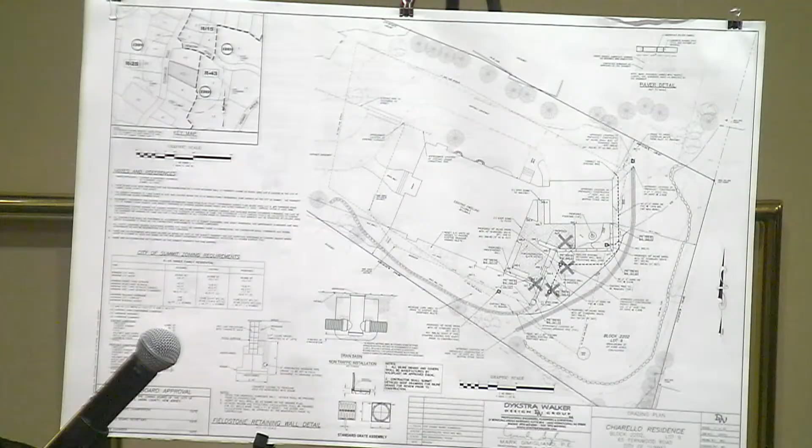All right, and I think you testified to this as well, but just to repeat, where will the drain system discharge? Everything on site discharges underground through the piping networks into the Fernwood Road drainage system. All right, is that the same discharge location which currently exists? Yes. And the grading and drainage system being proposed as part of this project are designed to make sure that the water is directed away from the neighbors' properties, not onto the neighbors' properties? Yes, that's correct. And could you please describe the soil erosion sediment plan?

There's roughly 4,100 square feet of proposed disturbance associated with this property. We have inlet protection on all of the inlets on site, both existing and proposed, to capture any silting that may occur during the construction process, so that way it doesn't end up in any of the drainage system on site or downstream. And there's also silt fence proposed along the downslope side of the property to also capture any overland silt conveyance.

Okay. Now, I do have to just make sure I check all my points here. There is a variance that is needed for this application, correct? Yes, there is. And that has to do with lot coverage? Yes, it does. And that is an existing condition? Yes, it is. And that was a condition not created by this applicant. That is correct, it was not. All right. And you testified that you were able to reduce that existing condition by 2 feet? 2 square feet, that's correct.

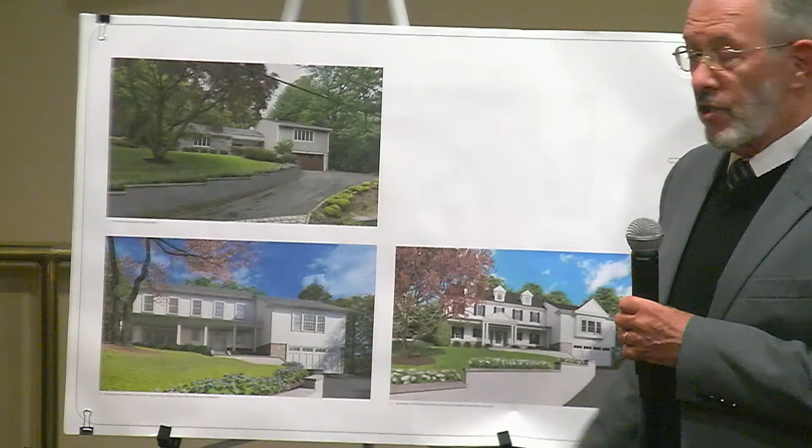What can be seen is the existing is in the upper left-hand corner. The original facade that was proposed is shown in the lower left corner, and the new facade is shown in the lower right corner. I have Mike Johnson here, and I have the architect Steve Kowalski if there's any questions. And we are up to A4. So this would be marked as A4.

Mr. Weber, I think we'd love to hear 5 quick minutes from your architect. If you could swing it. If I could ask Mr. Kowalski to be sworn in to give testimony in this matter.

Before I forget, I want to appreciate the board's hearing us tonight. I believe that this is the first time in the decades that I've appeared before this board that the board has had 3 hearings in 1 week. And it's remarkable, the dedication that you show to the city and to the citizens. Thank you, Mr. Weber. Your comments are greatly appreciated.

All right, if you could raise your right hand. Do you swear the testimony you're about to give in this matter is the truth, the whole truth, nothing but the truth? I do. And please state your name, spell your last name. Stephen Kowalski, Kowalski. Thank you. And you were just accepted by this board in the April hearing. No changes to your credentials since that last hearing? That's right. I imagine we'll accept you back once again. Welcome back. Thank you. So if you could just give us a brief overview of the changes between the last design and the current design, I think that would be helpful to the board.

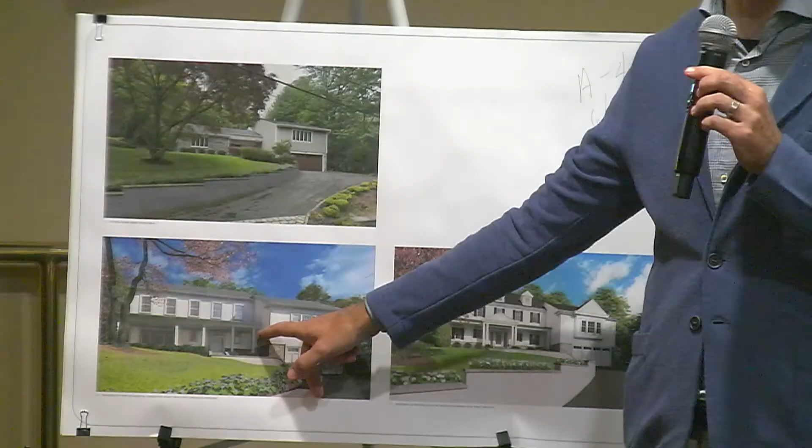Can you just walk it down, because I can't see? Oh, sure. You have this rendering. The only difference to what you have in your drawings is we're showing the prior approval. That's right, it's in the existing one, I'm sorry. Okay. But I can pass it around if you'd like.

And just to confirm, no changes to setbacks or height or overall FAR? No. That's correct. Okay, good. And that attic is unfinished, no plans to finish? It's unfinished. And there's no headroom. There's no space up there to use. Excellent. Okay, so any questions from our board experts for this witness? I do not have any questions. Neither do I, Mr. Chairman. All right, great. Thank you so much.

Questions from the board? One question. Okay, please. On this plan that you have in front of us, it's very clear the unfinished attic where the gables are. What's the ceiling height in the back space behind the primary bathroom? It tapers down to 0, but I believe where the bathroom is, it's already below 7 feet. Perfect. So it no longer counts as FAR once you get beyond that wall. Thank you for clarifying. Great.

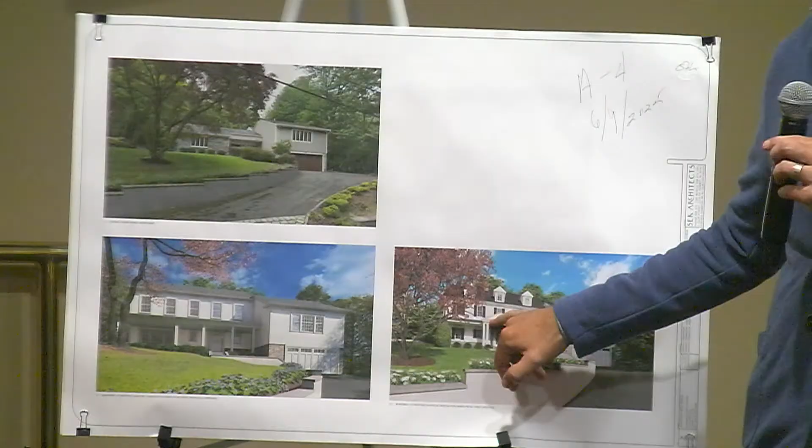Mr. Nelson, please. Just to be clear, the front gable doesn't come out any more than the front porch already is, or it does? We pushed the porch back and left the gable where the front porch was. So the gable is at the line that the porch was in the prior application. Okay. The remainder is pushed back to get that little definition.

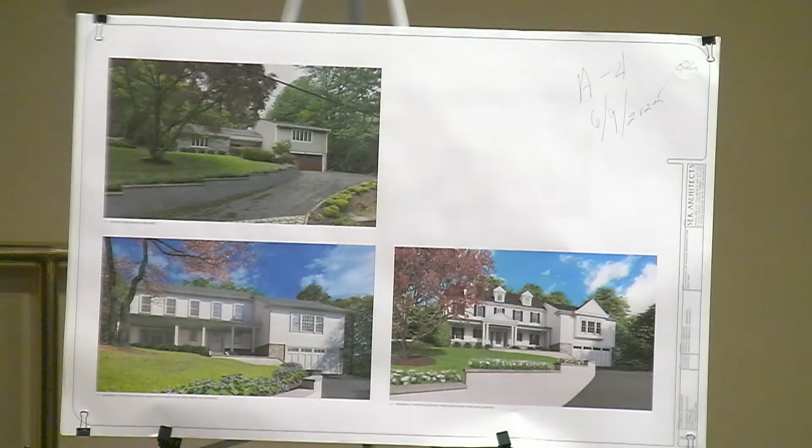And this might just be your artistic rendering here. There's no excavation for the driveway to make it deeper? No, that's a wall, that's the angle of the perspective. Shows more wall. No changes to the driveway, which is quite steep. Any other questions from the board for this witness? Seeing none. How about the public? Any questions only for this witness? Seeing none. Okay, great. Thank you.

That's probably the only witness we need tonight, Mr. Weber, so if you'd like to give us a summation that probably runs longer than the whole of your testimony, be our guest. We'd like to substitute A4 for the perspective that was originally presented to the board. Thank you so much. Okay, great.

Andy, conditions? First. What's that? Public. Oh, yes, sorry. Anyone wishing to comment on this from the public? Seeing none. So no new conditions, we'll just stick with what was in the prior approval. That's correct. Great. And our prior approval, give me one second. But there was an FAR variance, Jim, if you could confirm? FAR, building coverage, lot coverage, steep slope. Okay. So five votes are required to approve.

Okay, great. With that, we'll enter into executive session. Who'd like to begin? I can start. I can easily support this application. First, there are really no changes over what we approved in terms of the variances. And as I said in the last hearing, I thought the modified facade of the house was an improvement to the prior house in that it was more in the scale of other homes in the neighborhood and also the height of this home on the hill.

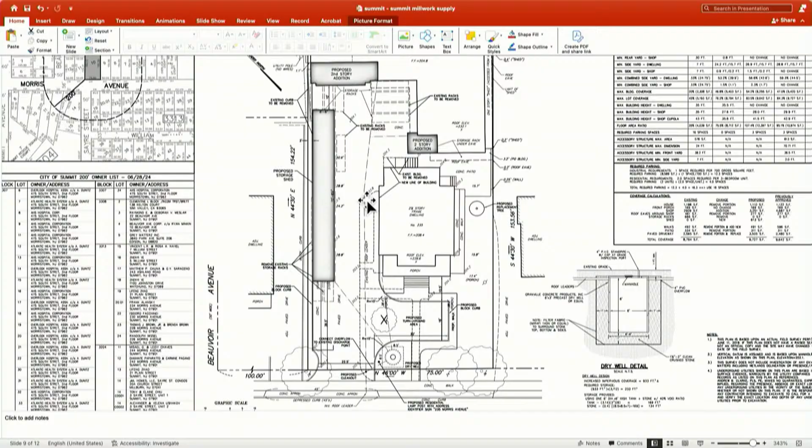There's one box truck that's associated with the property that does park on site. That was addressed in the previous application and testimony and the resolution. And the representation is that it'll be parked as close up to the shop as possible on the overnights. And that will continue. And we've also stipulated previously that that truck would not be larger than a 25-foot box truck. That's correct.

Okay. And can you talk about waste removal? Yes, the shop itself has very little actual waste. The wood products that are used there are reused in various ways or recycled in a meaningful way. So that doesn't have any sort of city pickup component to it at all. There's perhaps a little bit of general office waste that may be generated from the shop occasionally. And that, along with the resident refuse and recycling, is handled via the normal city pickup.

So they bring the recycling out, but then they come get the garbage. The garbage cans are currently underneath the porch, the front porch of the dwelling. There's like a lattice facade underneath the porch, and on the right side there's some doors, so they keep the cans underneath the porch. They're not even actually in sight normally.

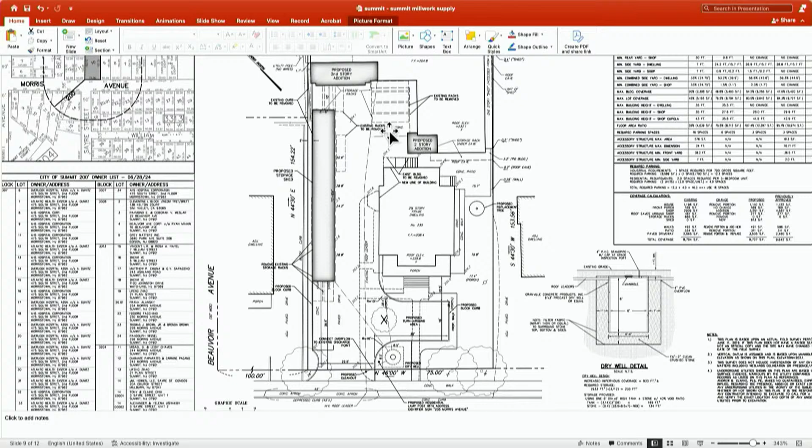And can you also discuss the upgrades to the HVAC or utilities that are necessary? Well, the HVAC is on the roof of the shop currently and will continue to be there. So there really is no significant change in that regard. And can you confirm the locations of any exterior or ground-mounted building equipment? Well, the equipment, as I said, is on the roof. Okay. So nothing on the ground? No. Okay, perfect. And we had previously stipulated that all exterior mechanical equipment should be located on the rooftop, so that's why we did that this time.

That's correct. And that's all I have for you, Mr. Clark. Okay. Great. Thank you, Ms. Wolf. Board experts, what questions do you have for this witness?

Okay, so we talked about the seepage pit, and I think it's just a best practice that it's off of the property line, but I understand the constraints that you have on the property. Right. I take no exception to leaving it where it is. It's far enough away from the road. Okay. There's enough space there, so I don't have a problem with that.

When I was reviewing the calculations for the seepage pit, I thought you were taking the whole entire house and the shed. Right. I thought that might be the case, right. That was what it was, so. So we're taking the shed and then one roof leader from the house just to get to the point where we're managing a sufficient amount of water that we're bringing the profile down a little.

Okay, so there's going to be two things that you're going to be doing. You're going to be making sure that you are capturing at least 933 square feet of water, because that's what you're adding. Correct. But you're also going to make sure that you are able to hold whatever water you are putting into it. Right, I'll re-verify the sizing of the dry well to confirm that the amount of roof we're picking up on the dwelling isn't actually pushing us over our storage capacity. And if need be, if I misjudged it, then we'll size up the dry well accordingly. Okay, all right, that's good.

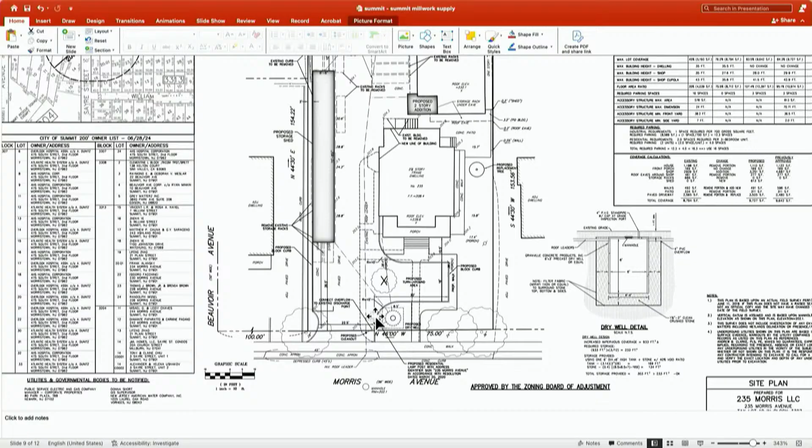You're addressing some of the stuff. We spent a lot of time doing conditions last time you were here. I remember that very well. And you've mentioned some of them, but I just want to ask, could we add conditions 8 through 16 in the 2020 resolution to this current resolution? I don't know if you've all read them, but our planner will address that actually in his testimony. Okay, because I remember we spent a lot of time with them.

And honestly, I think about this site every time I drive by, and after a year passed and they hadn't done anything, they're coming back, I just don't know when. So just to make sure we don't have to. Here we are. So like I said, we spent a lot of time, just to make sure that they're addressed again. Just as a board member who wasn't here in 2020, I would like to hear that testimony. I think that's important, as opposed to just reading it. So the planner's going to speak to it, that's great.

I do have one question as well related to the stormwater collection, and I realize there's limited spaces for collection here, but is there any prior stormwater management on this site? Other than the roof leaders that are brought to the curb, no. Okay. So there's no other dry wells or other management facilities of any sort on the property. 75% lot coverage now, going to 95%. And 75% of 11,000 is like 8,000 square feet of lot coverage. So I'm not looking at just what's added, I'm looking at the whole lot coverage.

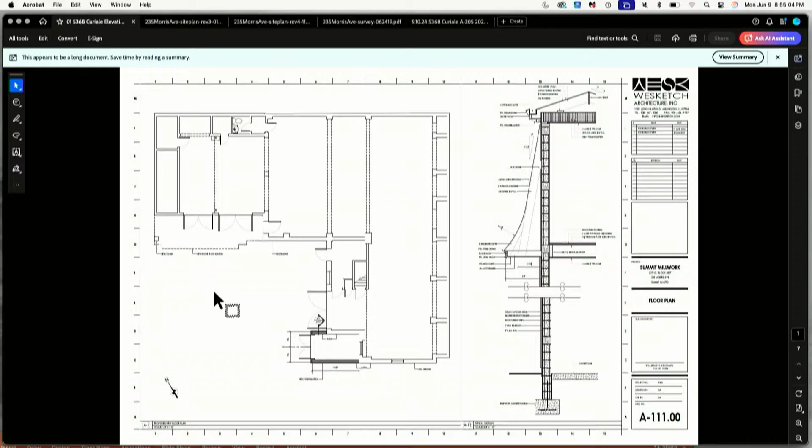Can you explain the purpose of the two additions to the shop? Right, so the small two-story addition here is to house the existing forklift so that it's out of view and stored out of the weather. The second floor addition on this part of the shop is primarily to help the facade, so we can get the roof to work with the existing large mansard roof, and it also provides a little more storage inside the shop. It doesn't go all the way to the ground; this addition is just on the second floor.

And with the new roof that goes on top of this portion of the building, we'll get a little bit more headroom inside there and more clearance to better store the different species of lumber that the shop requires once they're taken out of the shed and brought into the shop.

Can you speak to the question about how the length of the storage shed came to be? Right, well, we worked extensively with the owner, Aldo Curiale, on this. You know, he's been doing this for decades, and he knows exactly the lengths and species that are coming and going out of the shop. And it looks like a ramble of outdoor racks, but he knows exactly where everything is, the length of everything, and when it's coming and going.

So with that knowledge, he was able to determine exactly how to store the wood in the length of that shed precisely so that he can separate different lengths, different species, and the frequency of the use of the different species. So it makes his work much more efficient, bringing the wood in and out of the shop. Would it still function if it was smaller? No, I mean, he's got it down to the inches. The inch, okay.

And can you also describe the changes to the dwelling? Right, so on the main house, the only thing we're changing is there's an existing bay window on the driveway side of the property, and it's a one-story bay. We're removing this bay just to give more clearance for deliveries and movement of the lumber out of the wood shed into the shop. And then we'll replace that one-story bay with a double-hung window that matches the other double-hung window that's existing on that facade.

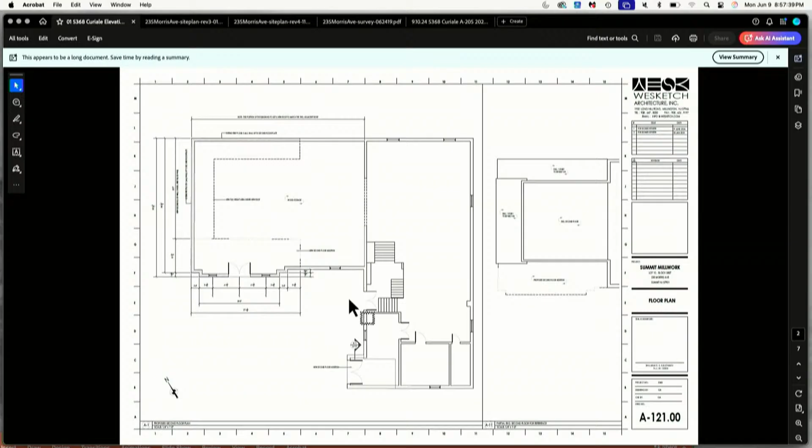Any questions from our board experts for this witness? I do not have any questions. Mr. Lyon? Neither do I. Okay, thank you so much. Questions from the board? Jay?

Can you go into the design of the actual shed itself, and how does that juxtaposition against the Victorian? Right, so because it's right up against the property, we have less than 5-foot separation with the property line, so it has to be a 2-hour rated wall assembly. So that's why we're using CMU. Can you just explain what CMU is? Concrete masonry unit, concrete block. And then we're going to clad that with cedar clapboards to match the house and the shop. And they'll all be painted in the same color.

And we've added some elements basically on the front of the building. We've added a false door, so it looks like an entrance. And it has a very small visual impact on the street because it is only 8 foot 8 wide. And it'll be the same materials used on the roof as the shop and the house.

I have two questions. One, relating to the fire code. Is there any need for sprinklering in this building? And if not, you're confident that fire code is not going to hold up construction? Yes, that's correct. We're under the limits for the sprinkler system with the building type. And with the existing stair now, we can meet the travel distance. So I can get you out of the building from the second floor in 87 feet, where the code requires 100 feet for an S1 storage occupancy on the second floor.

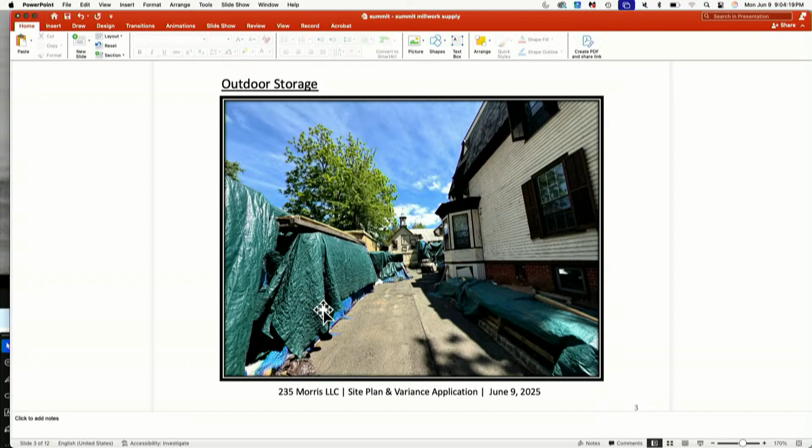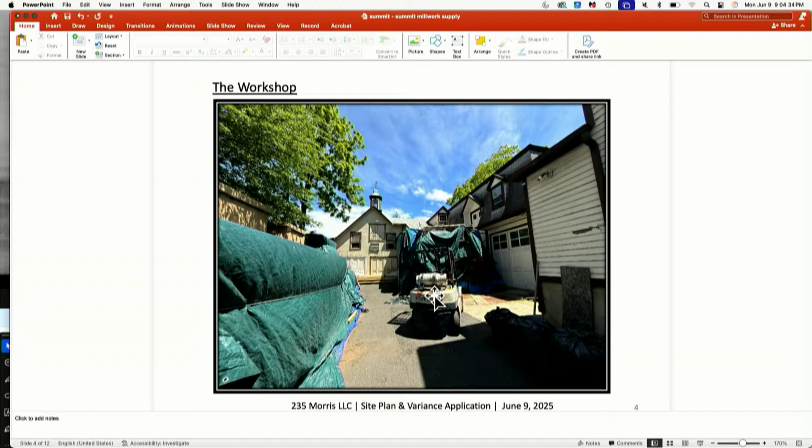Now, what we did, and I was on the original app with Mr. Sheehan from Amanda's office 5 years ago, what we did back then was get approved a large addition to the existing building.

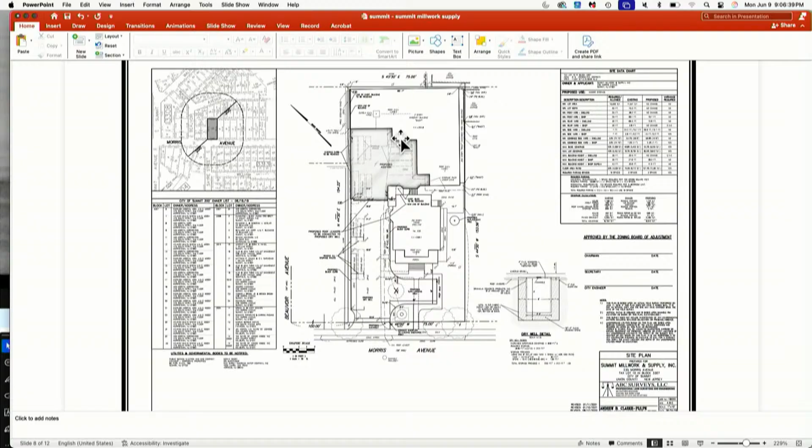This job eventually, as you heard, ran into all kinds of problems with fire suppression as we went to permitting. So that 2,800 square foot addition becomes the new case. On the next slide, that is a 613 square foot shed. As you heard, precisely dimensioned for the needs of the storage on the site by Aldo, as well as the two small additions previously described by our witnesses. Front addition for forklift storage, back addition, second floor only for more storage.

And then the shed runs along the westerly property line in a location where Mr. Clarke put it so that we could still use the driveway for circulation. Cars can still go through, forklifts can still go through, trucks can still go through. We always had a turnaround at the front of the property. Coverage goes up here only slightly because a little landscape strip along the side of the existing two-family home is removed to improve storage once that bay window is removed, bay window being shown more or less dead center

on the slide. So the overarching application in 2020 was remove all outdoor storage. That goal is met here with the new application. Everything I said back then can be said now. The purpose of this is to get the existing non-conforming use more compatible with residential uses in the area. Basically, all residential uses in the area are owned by the hospital, by the way. Two-family homes and some singles as well. But to get everything inside makes it more compatible with the residential neighborhood.

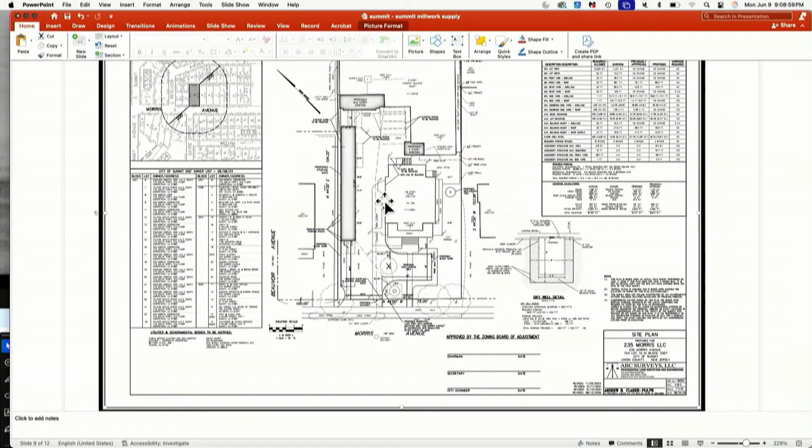Your 2016 master plan cited by Mr. Leiden's report says preserve residential areas, avoid conflict between non-residential and residential, create transition zones between non-res and residential, and that's what's being done here. All our bulk variances, which Amanda went through before, have been reduced in scope since 2020, some by a little bit, building coverage by a lot because our building went down so much in size. And they can all be justified by this overarching goal, which was to get storage inside the building.

The side yard setback request now is 2 feet for the shed on the westerly property line. That's to keep the shed out of the driveway. If we put it in the middle of the driveway, we wouldn't be able to get material into the building, we wouldn't be able to park, and we wouldn't be able to use the forklift. Floor area ratio remains a variance, but again, the idea here is a lesser increase in building coverage to achieve our outdoor storage. If we're going to eliminate it, we have to add rooftop to the site to hide the storage. Impervious coverage only goes up slightly, but it's basically the same as 2020.

Building coverage goes down. And again, when you look at our case law under Burbridge, as well as our case law under the pooling case, the idea is look at overall project benefits while recognizing the use is not going to wither and die the way some non-conforming uses do, but it's going to stay here, and you have to make your choice. Do you want to stay and look like a mess, or do you want to stay and look really good? We think that answer is easy.

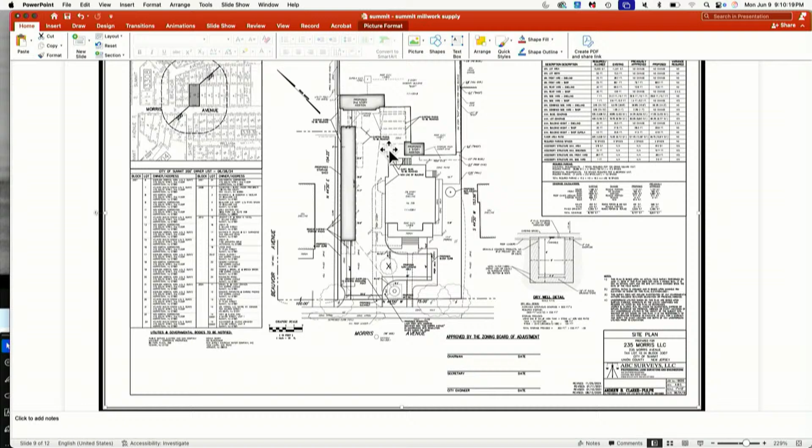So we have gone over the architecture of the shed. I don't want to steal our architect's thunder because we forgot to put up the rendering, but he prepared a rendering of the site. And hold on a second, please. So this is the final slide, 11, sheet 11.

Here is the two-family home on the right of this slide, Victorian in character, real nice contributing structure to the neighborhood, and then shed, left-hand side, westerly side of the property, and you can see architecturally, same color, same trim boards, roof pitch, complemented as best we could the existing home on the site, as well as the workshop in the back, which you can see in the background, and does have the same basic Victorian characteristics. Do you zoom in on that just a little bit? Mm-hmm.

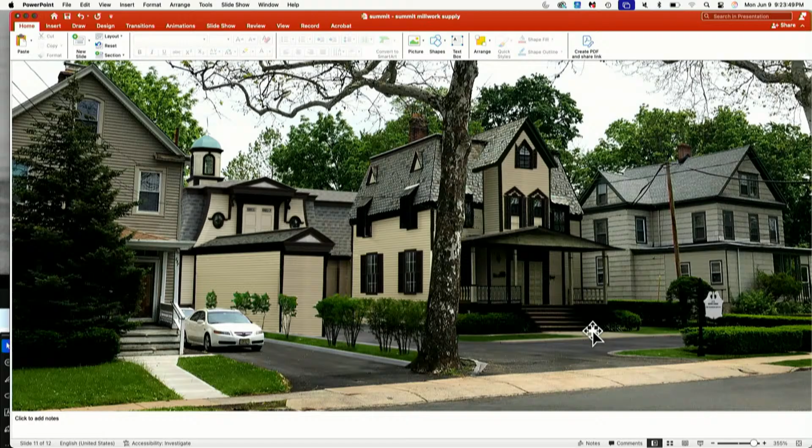Very good. So for the truck parking condition, I wanted to specify what that means, where is it going to be parked? Just because when I was there today, the truck was parked right next to the house. Somebody might consider that the back of the property because it's past where the house starts. I have a feeling that they mean past the back of the house, but it's not really clear by that condition. And seeing as we don't allow commercial vehicles to be parked overnight in Summit, if we do allow this, we do want it to be out of sight.

We agree. I think just to specify that condition a little bit more. So how would you word that, Andy? Are we talking about a particular distance from the building? Well, I mean, maybe mention that it was going to be parked by where it says the existing storage racks are in the back. So the rear of the driveway. Yeah. We would agree to it being parked to the rear of the home, meaning up against the workshop. Okay. Your concern is that it's not parked in the front yard, right? Yeah, the further back it is, the less visible it is when you drive by. So behind the home is an acceptable condition? Yeah.

Okay. And then the rendering here shows the shed, and it could be an optical illusion, but it appears that it's coming forward of the neighboring house, but on the site plan it shows it set back from not just the porch, but the front of that house. Can you clarify that? Yeah, it'll match the drawings. This was done in Photoshop, manipulating the existing photo, so it may not be as clear as it is on the drawings, but for sure it will match the drawings in its position.